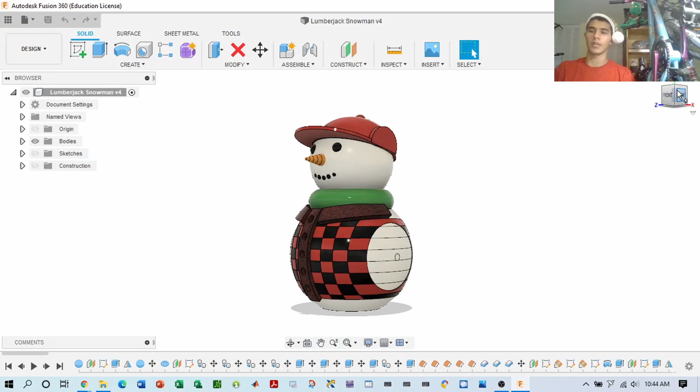So let's get started, and we'll start with a new file.

First thing you want to do is make sure all your origin and planes are defined and display them. You can display them with this looking icon at the top left corner of the screen. Here at the bottom left, you have your family tree, where you can see your history of the features you added, and over time, modify them if you need to re-edit them or change something.

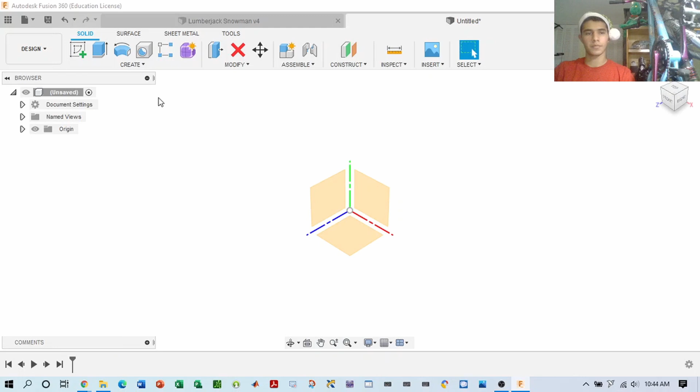So first thing we're going to do is we're going to create a sphere. So let's go ahead and create a sphere.

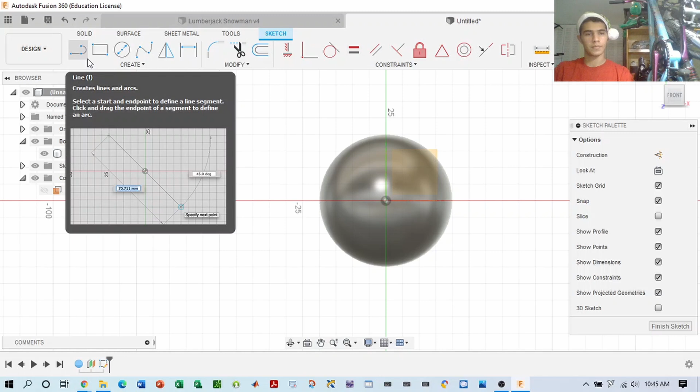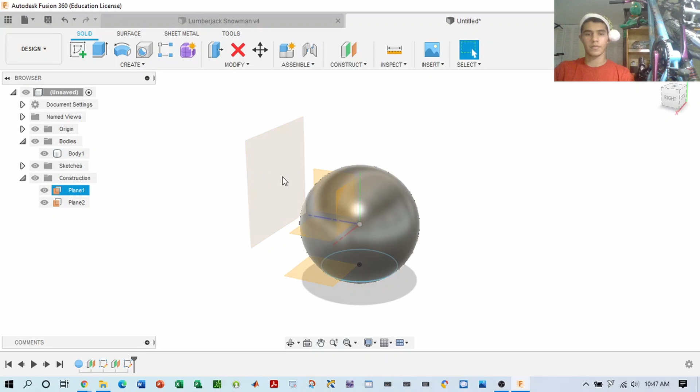Then what we're going to do is create an offset plane, so you can make a sketch. So we created two offset planes, one plane offset to this plane, and another horizontal plane offset to this plane.

And what we're going to do now is extrude this bottom circle to create the base for the snowman. With this extrude, we're going to create a mirror feature so we can get this same extrude on the other side.

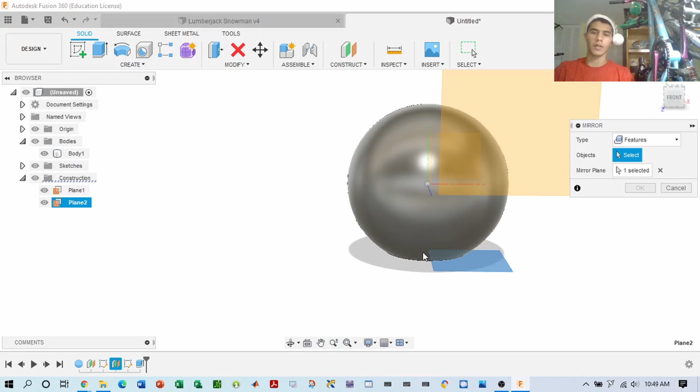And then we're going to sketch onto here the design for the lumberjack snowman's vest. So let's do that.

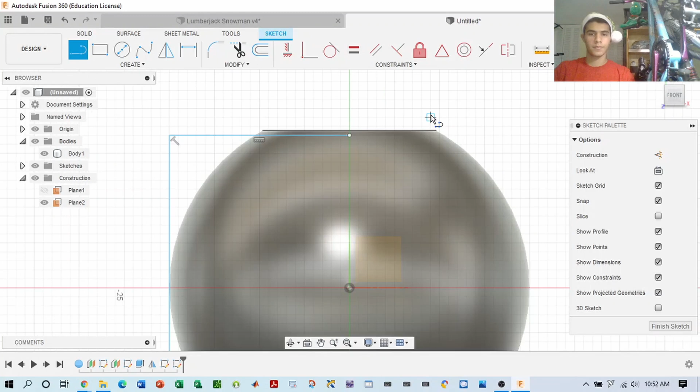When you're creating the sketch, we're going to be using something called rectangular pattern to create kind of like the checkerboard of the lumberjack's plaid shirt.

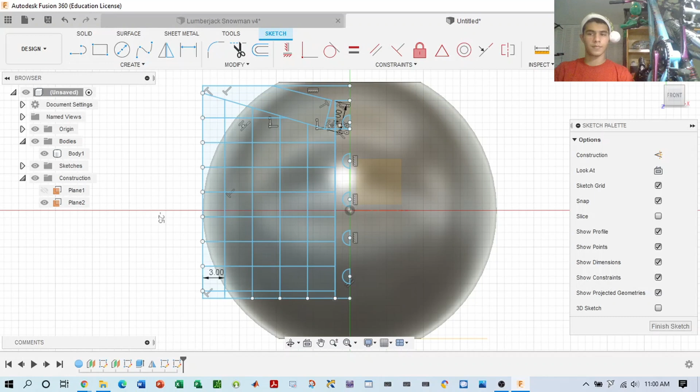Next thing you want to do, once you're finished with the sketch, is mirror it on the other side of the snowman, like that.

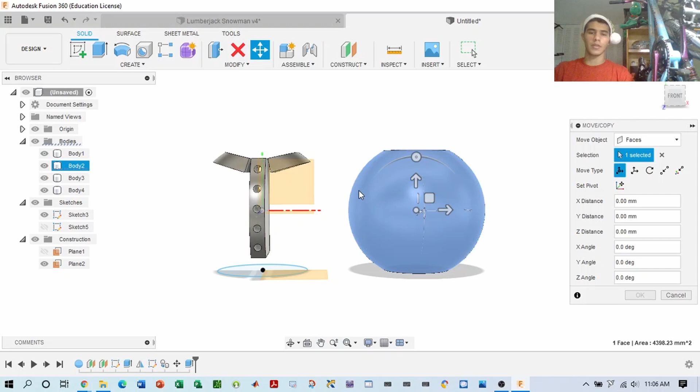Now what we're doing is we're extruding the sketches onto this plane, and we're moving new bodies into the old body, so then we can be able to extrude it by parts of the sketch.

We create copies so then we can keep a backup of the original circle, the original sphere, and then the finished product will be an extrusion of the entire lumberjack vest.

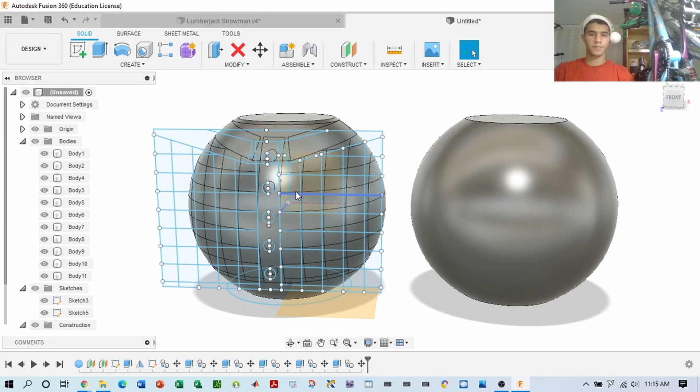So now once that is done, and you have this lumberjack looking vest, you want to create a surface offset of each individual surface entity you made. Let's do that.

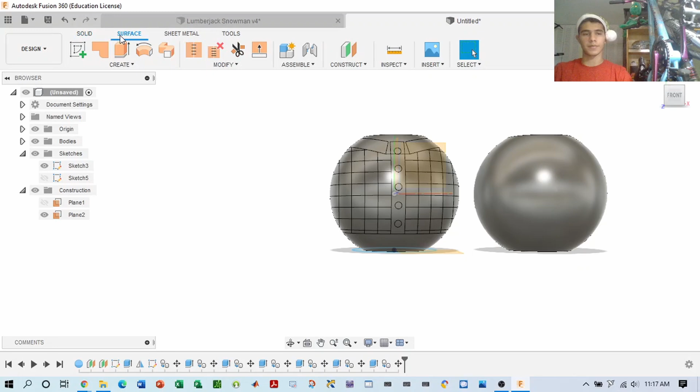And once that is done, you want to go ahead and create a thickness for each of these square tiles accordingly.

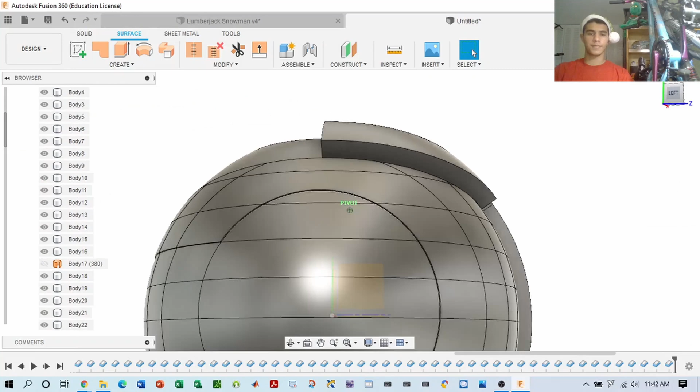So now that you have the thickness for one side of the vest, what you want to do is create the mirror tool, and use the mirror tool to mirror these features of these thicknesses that you added onto the other side of the vest.

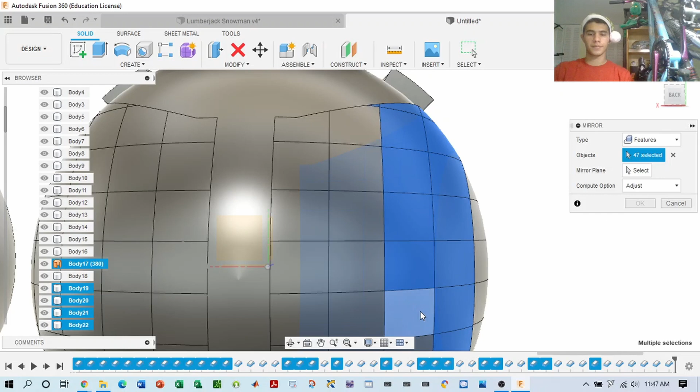So here we are. Once you have mirrored the other side of the vest and you're satisfied, just click OK.

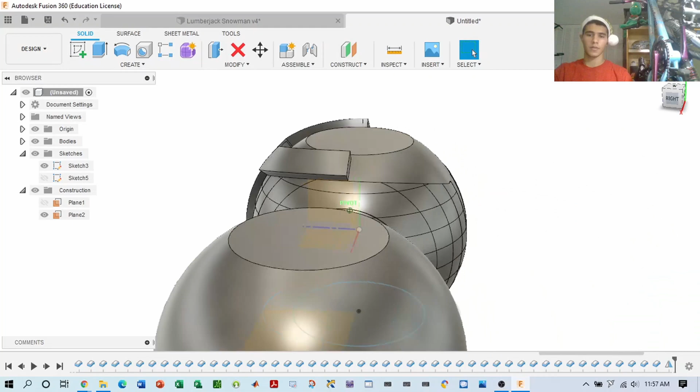So here you are. Once you mirrored all of the components on this side of the vest to the other side, the next thing we want to do is focus on the neck. So this is the base and the body of the snowman, the lumberjack snowman. Now let's focus a bit on the neck.

And to do that, we'll insert a torus.

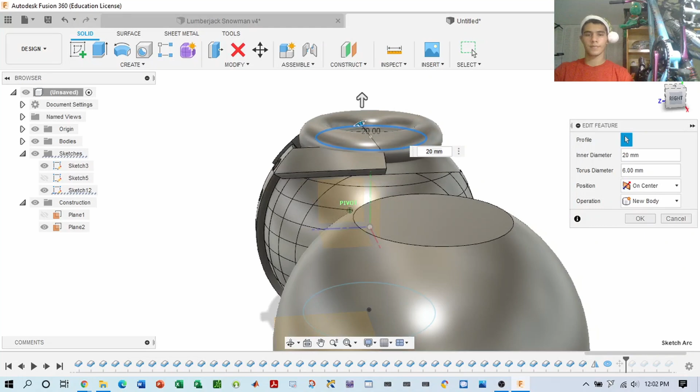So once you have your neck and your head parts, you can focus on moving it and creating the custom dimensions you like. Let's go ahead and do that. We'll be adding a lumberjack cap.

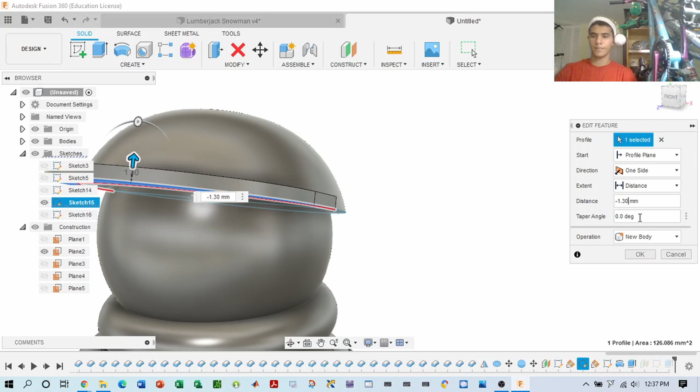So now as you can see, we have made the cap for the snowman. Now we're just missing the face features.

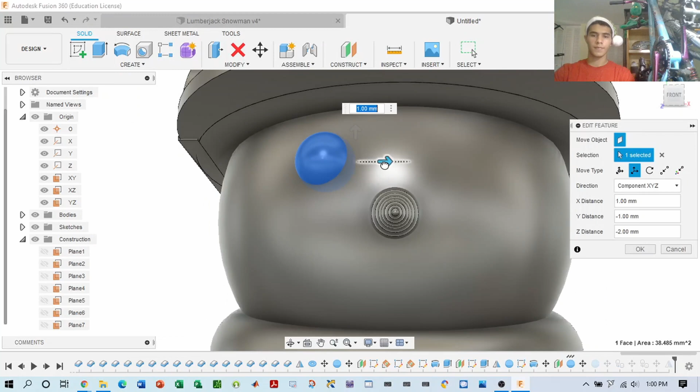So once you have your snowman, all that's left to do is add color properties and material properties. So let's get to that.

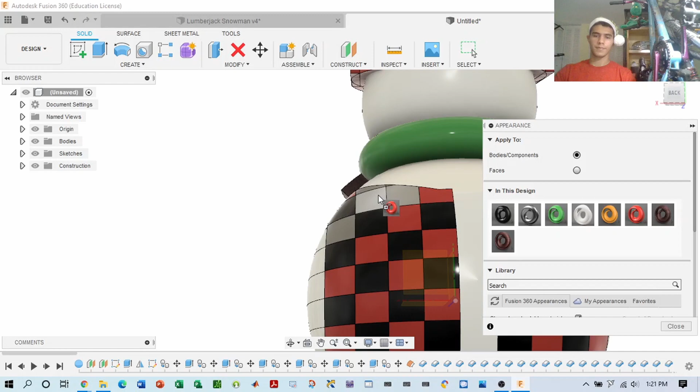And there you go. This is what you get when you're finished coloring it. You get the lumberjack snowman.

So now, if you want to, you can render it. And rendering just opens up the rendering studio. So let's go ahead and do that.

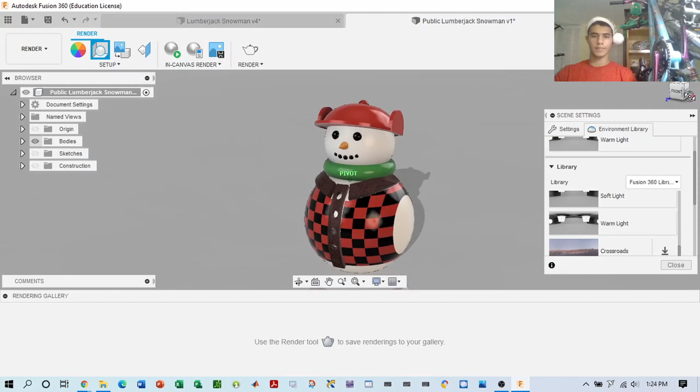So once you find an angle you're comfortable with the different settings, your orbit, you can look at, you can pan the object, then you can just go ahead and render it.

And rendering, what it does is create a professional, more realistic looking image of the picture, and you can go ahead and render it and wait for it to finish.

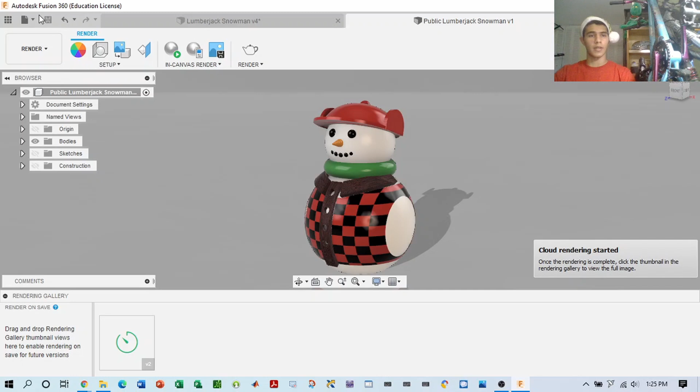In the meantime, you can go ahead and capture the image, which saves this workspace of the lumberjack snowman. You can save it as a PDF, as a PNG or JPEG.